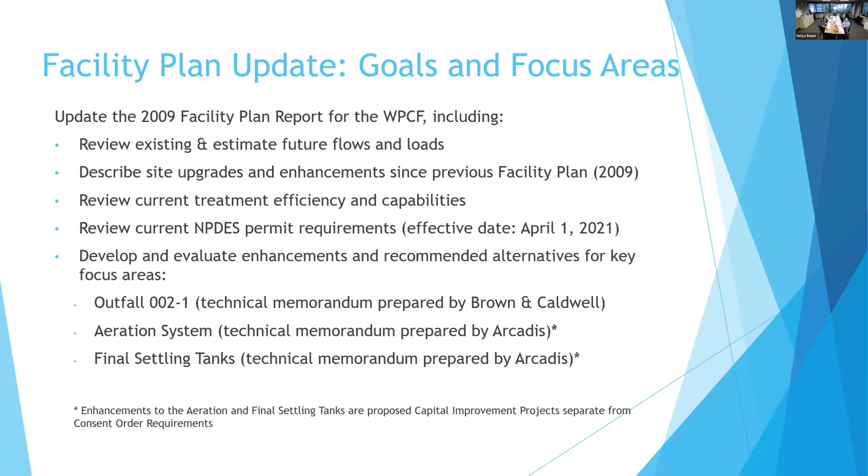And Arcadis is here to talk about the next slide. Thank you, Ralph. Vanessa McPherson here from Arcadis. I'm the project manager on our end for this facility plan update.

So the headline here on population flows and loads is that the plant continues to have ample capacity for treatment. You can see the figure that we're showing here on the screen has a red line at 18 MGD, which is the permitted capacity for the plant.

At 90% of that 18 MGD, or the orange dashed line, that would trigger the city and WPCA to need to submit a plan to the state for how they intend to deal with the fact that they're approaching that rated capacity. But what you can see in the chart is we're well below that.

So the green is the 180-day moving average of daily influent flow to the plant. And the blue line through that is the trend line that shows us trending downwards, which is really great and a testament to all the I&I reduction that's already been done.

And so that leaves us with a current 12-month average daily flow to the plant of 12.2 MGD. So that leaves us, again, with plenty of capacity, even with the roughly 650,000 gallons per day of additional flow that we'd be projecting just based on population increases and plan development in the city through 2030, as Ralph mentioned. So again, with 12.2 and the additional flow, still well within the rated capacity of 18 MGD.

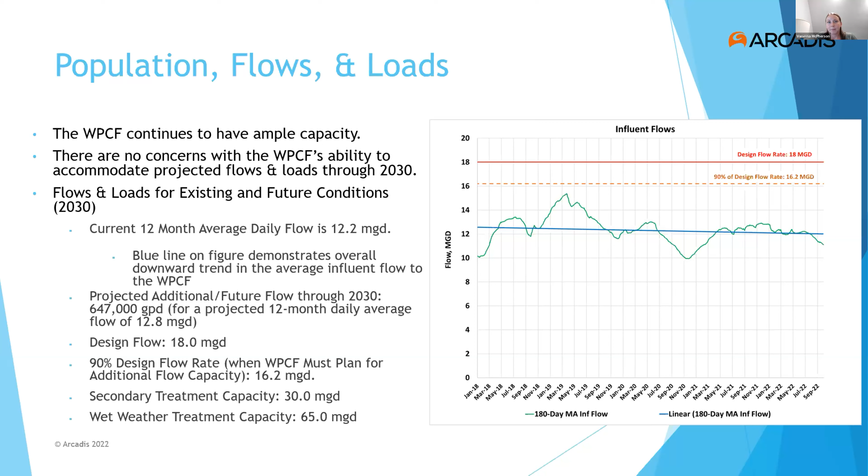So our next slide here shows permit considerations and process evaluation. As Ralph mentioned, we took a look at the current NPDES permit that the plant operates under, which is effective April of 2021. There are no substantial changes in the current version of the permit as compared to the last iteration, which is good.

Here on this chart, what we're looking at is the fact that the plant is performing extremely well. The red bar is the total nitrogen limit that the plant operates under, and the gold or orange bar is the general permit which Connecticut has for nitrogen. When you look at plant performance and that blue trend line, it's well within the permit limits for the site-specific permit and the general permit, with a downward trend, which is really a testament to operations and performance of the plant. An added bonus, in 2022 Norwalk ranked 5th in Connecticut for the nitrogen credit sharing program, which means you're selling credits or doing better than expected.

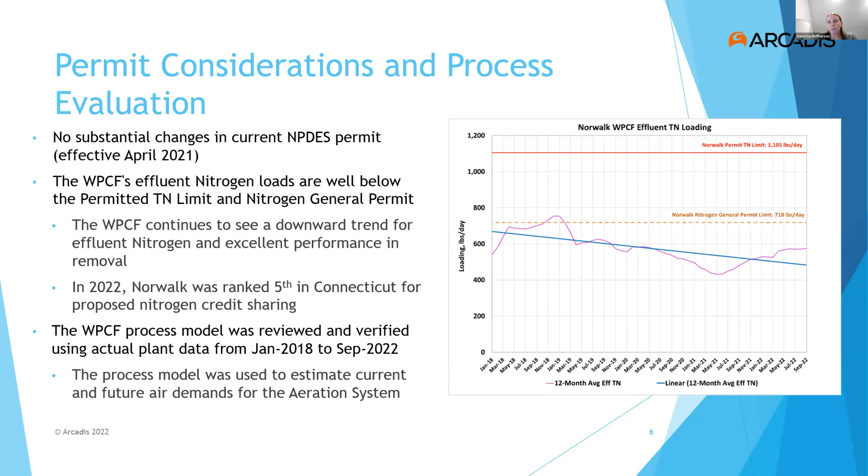We also took this opportunity in the facility plan to update the process model using actual plant data, to help us with certain tasks under the facility plan update, like sizing blowers, which I'll talk about a little bit later. So all good news here from population flows and loads and a plant performance perspective. And with that, I'll turn it back to Ralph.

Vanessa. So what we're showing here is a flow schematic at the wastewater treatment plant. We have 3 focus areas highlighted. The first 2, the aeration system and the final settling tanks, are highlighted in orange. This is outside the consent order. These are focus areas that we're looking to enhance long-term at the wastewater treatment plant, and also for asset preservation of the facilities at those 2 critical processes.

The third, the green box, is outfall 002-1, which is our wet weather process and discharge, which only activates less than 4 times a year, typically in a typical year.

The next slide, Beryl's going to talk about. Oh sorry, if we can go back to the previous slide - the next slide we are going to talk about outfall 002-1 in more detail. There's a couple options. Originally, Arcadis looked at adding treatment at the facility for outfall 002. When we looked at that, we started looking at an alternative approach, which ties us back into the collection system - approximately 206 miles of pipe - and looking at what we can do to reduce flow to the treatment plant. So Matt's going to talk about the advanced elimination of outfall 002 on the next slide.

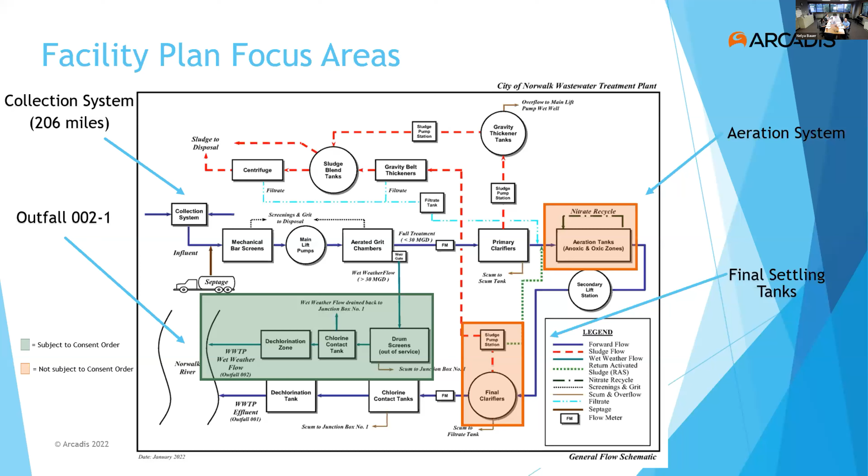Thanks, Ralph. As I mentioned in the previous slide, the consent order with Connecticut DEEP addresses 2 different areas within the Norwalk system. One is the collection system, that was addressed in the collection system master plan. The second is the facilities plan update. Within that facilities plan update, there are 2 additional options that the city can use to achieve compliance with that consent order. We have those 2 options laid out here.

The obligation requires the city to develop a facilities plan update, which, as was mentioned before, was in the works prior to the consent order. But that facilities plan is required to evaluate a range of viable and cost-effective measures to either, option 1, provide outfall 002 with primary treatment or its equivalent, or, option 2, eliminate outfall 002-1. Those were the 2 options that Ralph was discussing when looking at the schematic on the prior slide.

Vanessa Valadares, Chief of Operations with the city, is going to talk a little bit about the approach that we took, looking first at option 1 and then option 2 moving forward.

Thank you, Matt. So what we did is first we looked at option 1 and see what we could be focused to update the facility plan. Arcadis explored options for how we could provide primary treatment during the wet weather. After all those studies, we came up to the conclusion that we would need to invest about $45 million, and we're only going to be using that outfall on average less than 4 times a year.

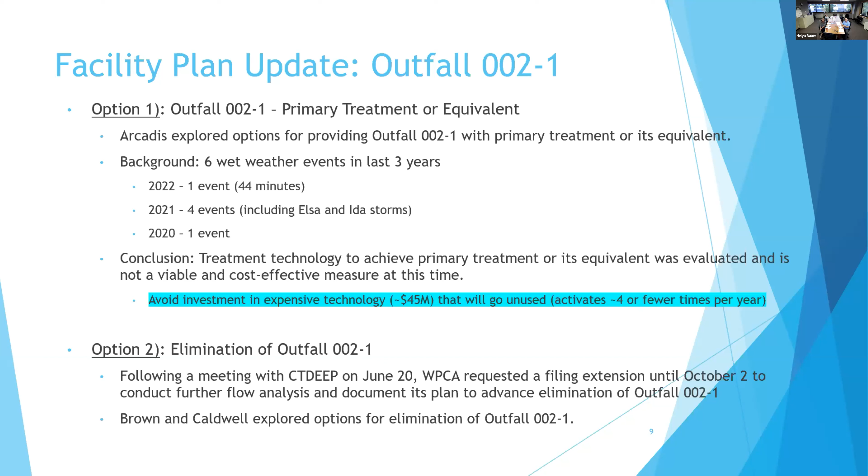Great, thanks, Vanessa. Eric Muir from Brown and Caldwell. As Matt stated in the intro, we can go to the next slide right there.

As Matt stated in the intro, I was in front of this board about a year ago in September with a very similar slide where we discussed the collection system master plan as it was submitted. Just as a refresher, what we did during that master plan is a flow metering exercise and then developed a calibrated model of your collection system flows. In that model, the data showed us that 18 sewer sheds exhibited excess flow generation, meaning they generate excess inflow or infiltration, either from directly connected sources or deficiencies in the collection system.

That represented an opportunity, given the costly venture of doing primary treatment for very little use at 002, to take a look at whether we could do something different in the collection system and reduce the flows.

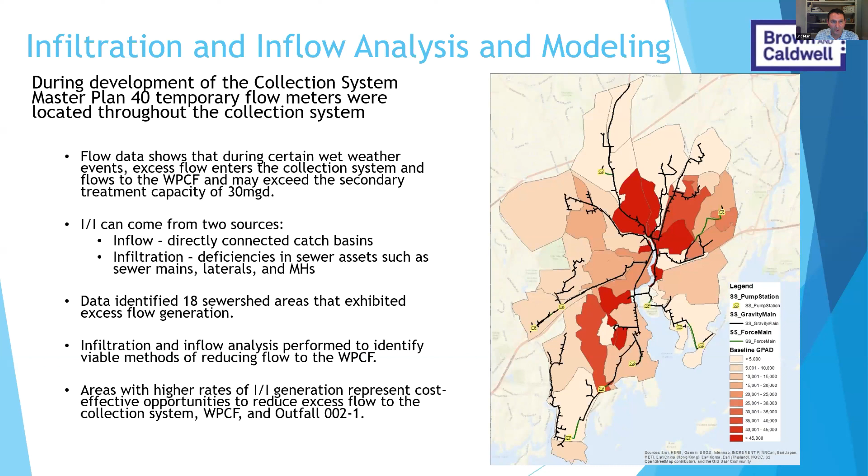So what we did is take that model we had generated about a year ago and looked at it again, asking what if we supercharged infiltration and inflow removal over a 10-year period, as opposed to the extended asset management timeline originally discussed in the collection system master plan. Could we progress towards elimination and advancement of the elimination of 002? Could we progress the overall reduction of other overflows and SSOs in the collection system?

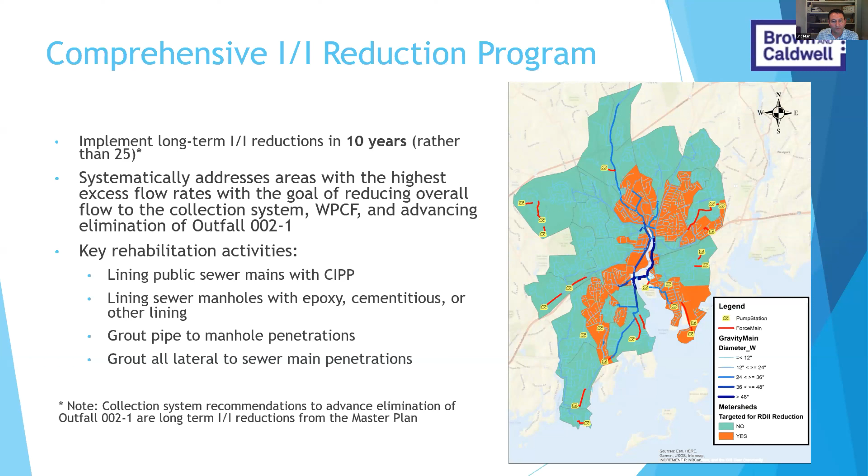We modeled key rehabilitation activities in those 18 sewer sheds that still exhibited high excess flow. We looked at lining the sewers, which is an asset renewal that keeps flow out. We looked at epoxy lining of the manholes, grouting the pipe penetrations to the manhole connections, and grouting the lateral connection points to the sewer mains. Then we modeled what those flow reductions would look like and ran the model for several different storms.

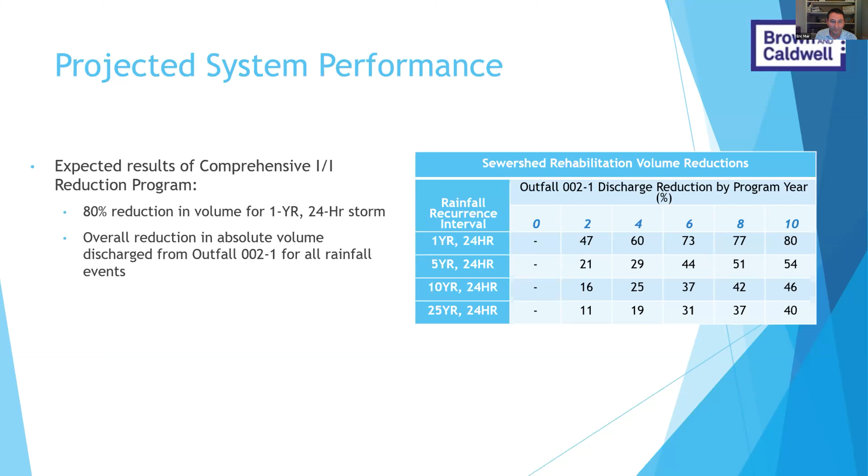This table shows the output of those model runs, and it turned out to be really good news. It showed an 80% reduction in overall volume going through 002 in a 1-year, 24-hour storm. The table on the right shows we're at year 0 right now, and if we tried to do this over 10 years, it shows the 2-year increments of volume reductions through the program years. The rows going down show the 1-year, 5-year, 10-year, and 25-year storm. So really good advancement from a collection system standpoint—an 80% reduction in flows in a 1-year, 24-hour storm. That's extreme progress towards renewing your assets and substantially reducing flows.

Next slide. This shows that same information in a different format. Each column is a different storm event. This also shows the typical year that Ralph was mentioning earlier, where we can model how many activations we have in a typical year and show that volume reduction as well. There you get to almost a 90% reduction in a typical year in the volume going through 002. The bars going across show the volume reductions by those 2-year increments. The one all the way to the right for each storm would be the end result. You can see graphically there are substantial reductions across the board.

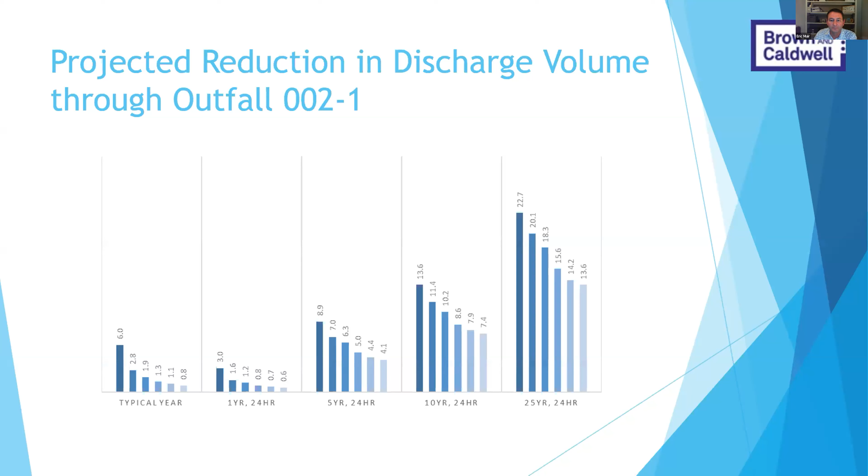This slide shows the costs of a rehabilitation program like that—program years, length of sewers rehabbed, construction cost, engineering and contingency cost, the 2-year increment cost, and a total cumulative cost. What you can see is the total cumulative cost over a 10-year period is pretty close to what Arcadis came up with for projections of a cost of new treatment at 002, with a total program cost of almost $50 million.

And here what you're getting is really a completely renewed asset as opposed to a new asset. This acts every single day—we're reducing flows to the treatment plant. So there's a ton of benefits that come along with it. But the other substantial thing is for that collection system asset, which is you guys have about 200 miles of gravity main, this would represent almost 25% renewal in that collection system.

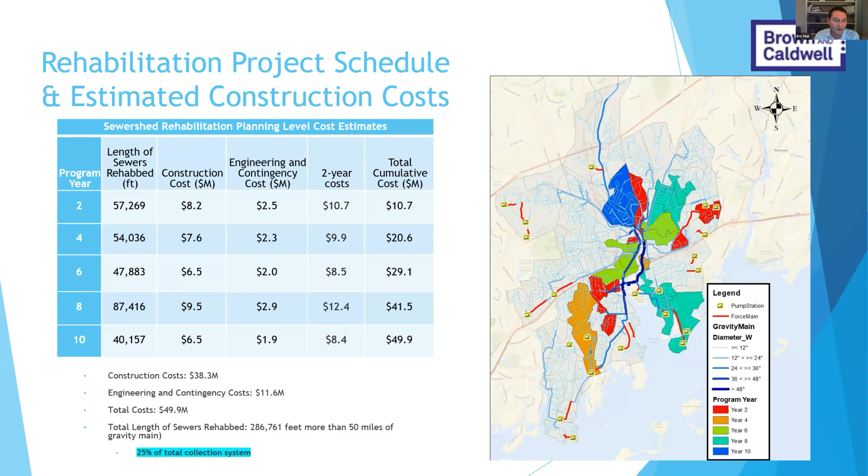So in other words, we're touching 25% of the collection system and rehabbing it in some way to reduce those flows. So you get an asset that you already own that gets renewed and has a new 50-year life cycle on it. With that, I'll turn it over to Vanessa to talk about some of the other benefits.

So beyond that, we realized there were other benefits we're going to gain if we pursue option 2, which is the advanced elimination of outfall 002. We have environmental benefits, including enhanced water quality in Norwalk River and Long Island Sound, reduced potential CSOs, and reduced potential SSOs. That will also help with advanced elimination of the Ann Street emergency overflow siphon, and of course we'll be in compliance with the Connecticut DEP consent order, fulfilling that obligation.

Besides the environmental benefits, we'll also realize energy efficiency benefits because we're going to reduce the WPCF operation and maintenance due to a decrease in overall flow. We'll also improve process performance through reduction in peak flow and duration of sustained high flows, so we'll likely be operating more consistently at an optimal stage. That's very aligned with Connecticut DEEP's energy efficiency goals.

Another important thing, which Eric touched on, is that this investment will also help preserve our assets. We're going to be shifting money toward assets we already have and giving them an even longer life.

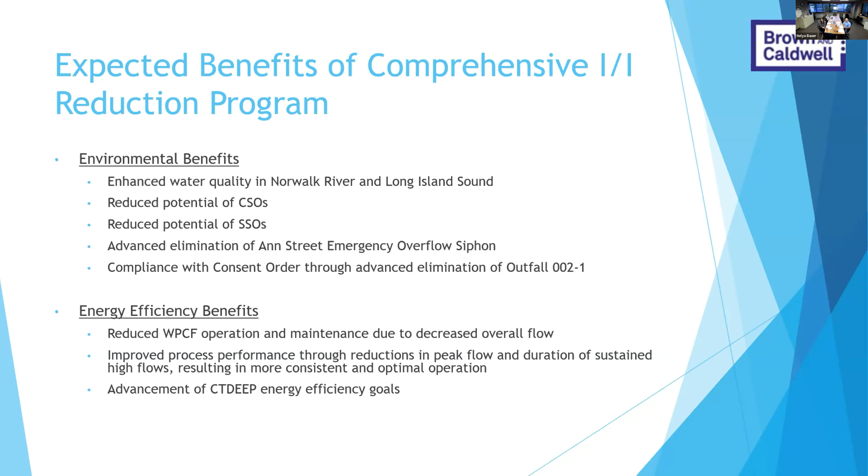So now, regardless of the elimination of outfall 002, as explained earlier as part of the facility plan upgrade, we were able to identify two focus areas where we believe we can make capital improvements in the next few years that will provide benefits. Vanessa McPherson will now go back and explain what we found and what the benefits will be from targeting those two areas.

Thank you. It's fitting to roll into the aeration system right after the energy efficiency discussion. This is one of the biggest energy users at the plant, and we've found significant ways we believe we can improve aeration, which is really the heart of the treatment plant—that's where nitrogen removal happens.

So what we're proposing for the aeration upgrades scope would be a comprehensive upgrade to the entire system: the blowers that supply the air, the diffusers that get air into the tanks, the piping that brings it there, valves, flow meters, and really everything within the tanks.

It also encompasses significant improvements to the secondary control building, or SCB, including replacing some antiquated medium voltage equipment with more modern low voltage power for the blowers. We'd also be looking at code compliance, architectural improvements, structural improvements, and significant layout improvements within the building to increase resiliency. Right now the blowers are located in the basement, or lowest level, of that structure.

I'll talk more on the next slide, but we're proposing relocating those blowers within the building to keep them out of harm's way, which also helps with construction sequencing. When we look at all of those recommendations, we estimate a construction or project cost of around $48 million for the aeration upgrades.

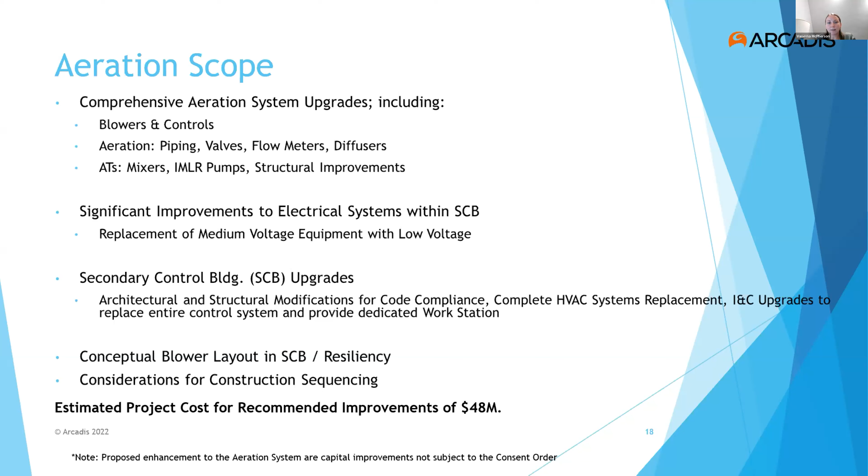On the next slide, I'll touch quickly on how we selected the blowers. As mentioned, we updated the process model for the plant and worked with Veolia to identify DO targets in each of the zones. We selected blowers that can turn down all the way to the minimum, and also have room for expansion to the peak flow, so they can cover the full required range for aeration.

We looked at energy efficiency, footprint of the blowers, and redundancy for staff operations. The blowers we selected are turbo blowers. They'll be located on the mezzanine level of the SCB, secondary control building, with a total of 4 blowers and space available for additional blowers if needed in the future.

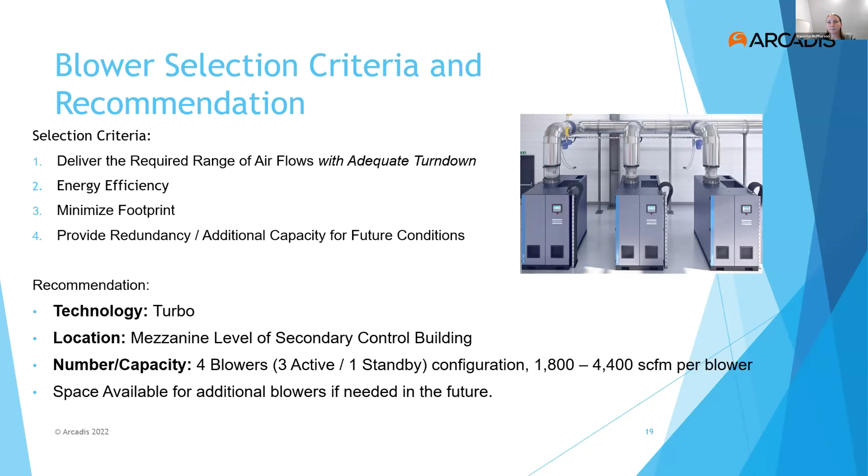So with that, I'll touch on final settling tanks, which is the other focus area of the facility plan, not subject to the consent order, but good to keep in mind for capital planning and operation of the facility. We looked at retrofitting the 4 existing concrete final settling tanks with new mechanisms, and we looked at 3 different options for technology for the mechanism replacement.

Spiral scraper is the selected recommendation for mechanism replacement, so we're proposing to move forward with that.

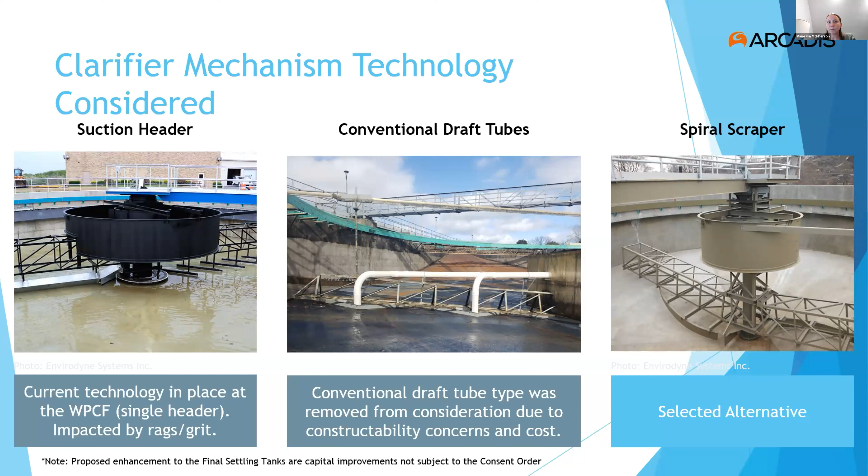On the next slide, similar to aeration, we're not just stopping with the mechanism. We're also looking at doing some modeling to design an energy dissipating inlet, which will help with sludge blanket stability and sludge removal, and different options for baffles and effluent launder covers to prevent algae buildup. We're also recommending some increases to RAS pumping capacity, which we'll refine as we get into detailed design. But overall, the recommended improvements for the FST area are $20 million.

And with that information, I'll turn it back over to Chief Valladares to conclude us.

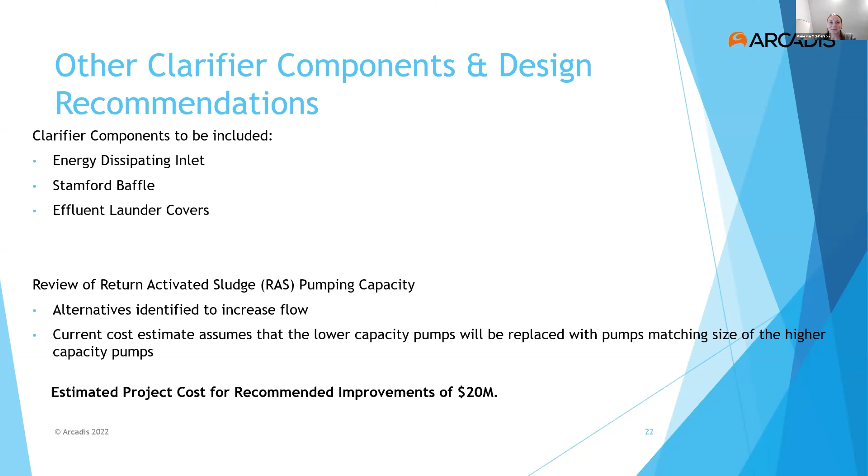Thank you. So what we would like to get from you guys tonight, as part of the resolution that will come after the presentation, is approval of the summary of the facility plan that we plan to submit by the deadline of October 2nd. So the facility plan update will have 3 components.

The first one will be that instead of going with option 1 that was shown before, which is really the facility plan update, we're going with option 2, the advanced elimination of outfall 002. As we mentioned, we believe we can increase the investment and complete in 10 years what originally we thought we could do in 25.

It's definitely going to meet our consent order. We're going to really invest in our asset, and we're going to go toward the goal of advanced elimination, as you could see on all those slides, and only use it for a few events. So that is the first part of the plan.

The second part will focus on the other two areas that Vanessa just explained, the aeration tanks and the final settling tanks. I want to emphasize that the investment in the outfall 002 advanced elimination is really what's part of the consent order, and that will be our financial obligation after we submit the plan. That will be about $50 million.

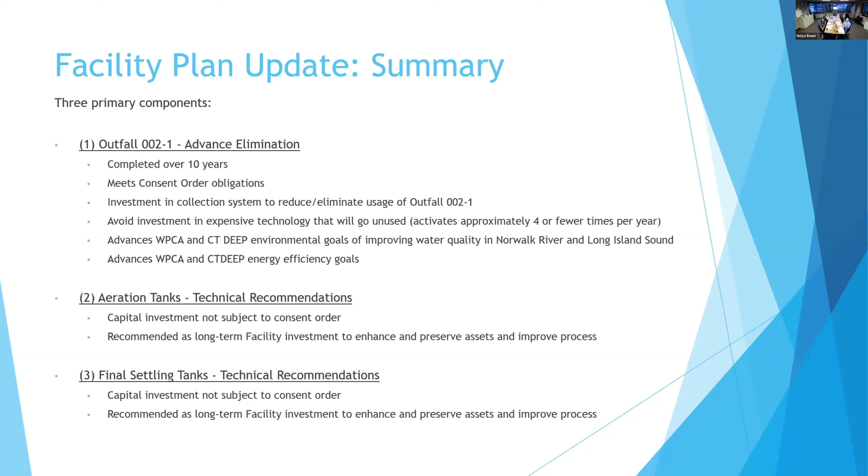So I think with that, this is really what we wanted to show you guys. I also want to thank the team. They did a fantastic job, particularly these last 90 days when we decided to move to a totally different direction, and everyone came together to present this on time. So with that, I'm open to questions.

Okay. So we're taking care of the consent order. The facilities plan is going to address part of the consent order. It's going to cost us $70 million over the next 10 years. And by authorizing the Chief of Operations to submit the facility plan, we're kind of committing to that. Is that right?

I just want to clarify that we're going to be committed to $50 million for the next 10 years. So this is really the commitment. The other 60, yes, 50, that is... 49.9, so let's round it to 50. The other $78 million that we identified as areas we would like to focus on for enhancement, we don't have to do right now. We are planning to probably do that after we have most of this investment in the collection system done. So we're going to spread out those $78 million probably after year 10, and the next 10 years after that we'll probably be able to spend the 78 million.

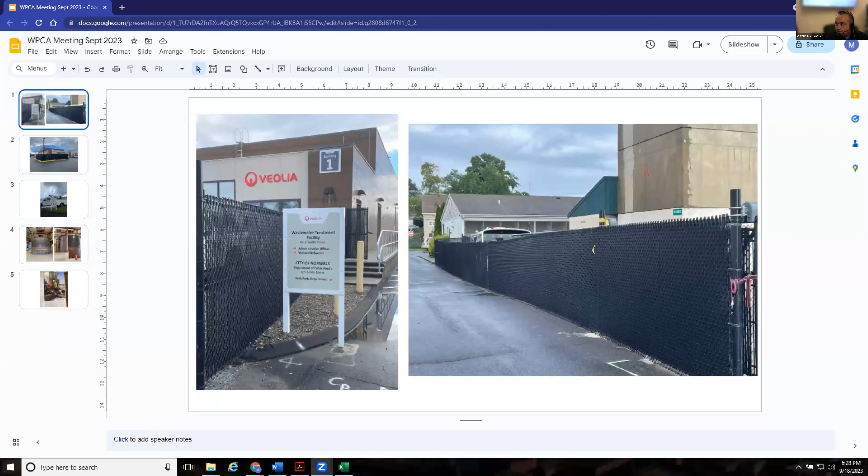One of the things was a fencing and signage plan that we've worked with the WPCA on. This is by the main office. We slatted the entire fence and straightened it out. They also slatted the entire front of the facility, all the way across, including DPW. This is the septage receiving area, kind of an eyesore for our facility. So working with Ralph, WPCA, us, and our fencing contractor, we decided to fence and slat the whole area. It looks a lot better.

Part of the signage process, we've also co-branded our office area. It came out really nice. We have bubble letters that stick out, the WPCA Norwalk and Veolia. And you can see here, we put new building signs in all the buildings. So we've been really working on updating the aesthetics of the facility, making it look really well, and it's coming right along. We have signs throughout the facility that could direct you to operations, deliveries, etc.

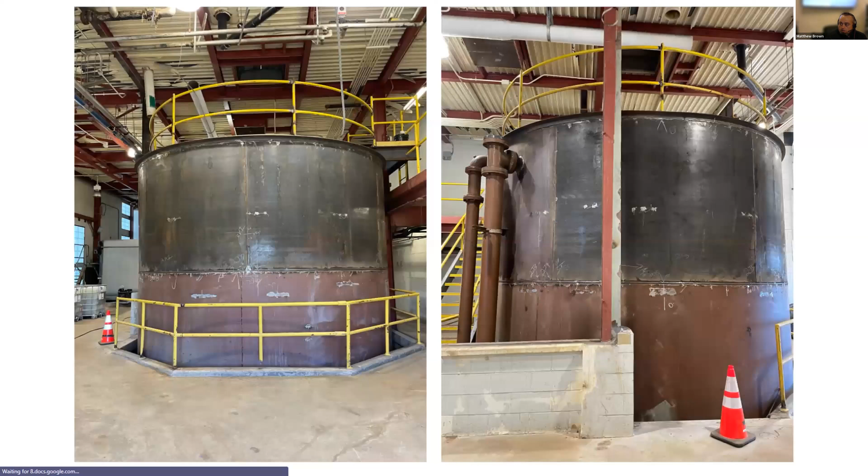This is the blend tank that I was speaking of. We have two of these blend tanks. One's a sludge holding tank. One we blend primary sludge and secondary sludge to run over our centrifuge. That's how we make what we call cake, which is a 28% solids product that gets sent out and incinerated. And that's how we keep our plant where it needs to be with microorganisms.

The Fisher Tank Company came in, they spent about 5 weeks here, morning, noon, and night, and replaced the entire roof and all the sides of the blend tank. What's going to happen next is we already have a contract with them, it's been approved by the WPCA. A coating company is going to come in, sandblast old and new steel to get it down nice, and then do a thick coating on the inside and a coating on the outside. That'll be ready to be put back online hopefully by Thanksgiving, because the schedule for the coating looks like mid to late October, and that's about a 2-week process.

That's one of our large projects that's been going on for over a year. Some of you might remember we were fixing it about a year ago. The sandblasters came and blew holes right in the side of it, and that's what led to replacing all the steel. But that came together.

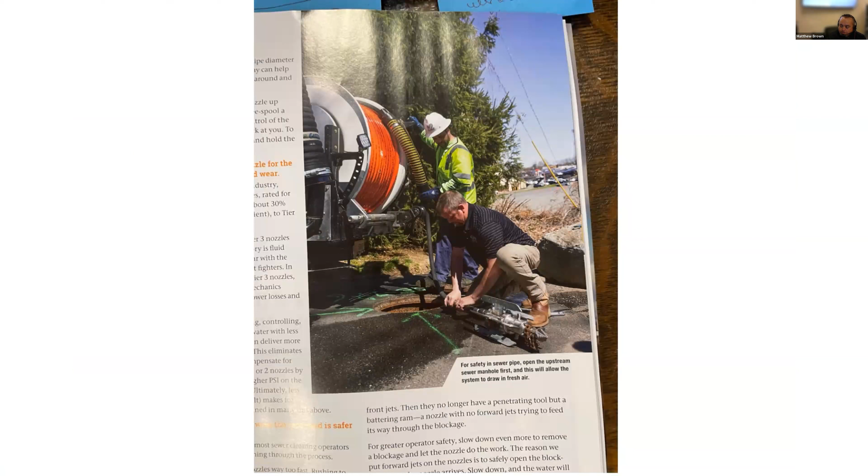Lastly, I just wanted to put this in there. It was taken about a year ago, but Public Works Magazine gets delivered to probably every municipality in North America. That's our Davidson, and that's our truck, WPCA's truck. We were featured in that with a chain cutter. So we were in Public Works Magazine. It made our employee Davidson's day, and the collections team were very happy to see it. I just wanted to share that with everybody.

If you have any questions, I'd be happy to answer them.

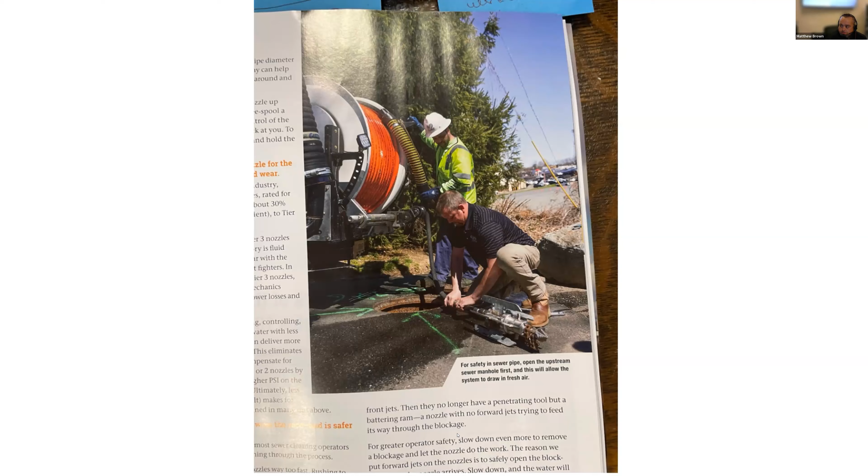The fiscal year 22-23 and fiscal year 23-24 revenues and expenditures news report is attached. Copies are included if there's any questions on that.

Now we have a discussion of the WPCA engineering projects. The Bell Island Salmon Street project consists of about 8.5 miles of pipe lining. The pipe is primarily asbestos cement pipe that's in poor condition, 8-inch to 24-inch pipe size. We finalized the bid documents in early August, and the project was advertised for bid in mid-August. We're currently receiving questions from contractors, and I've been working with the Brown and Caldwell team to respond to those questions. The bids are going to be received on September 28th.

The Catch Basin Disconnect Program, as part of the collection system master plan, identified catch basins that are significant inflow contributors to the collection system. We're currently working with the Brown and Caldwell team on the project. The city stormwater field staff provided assistance by surveying catch basins in the vicinity of those to be disconnected. They were able to record dimensions and invert depths. That investigation lasted about 2-3 weeks, so it was really productive to get all that field information we needed.

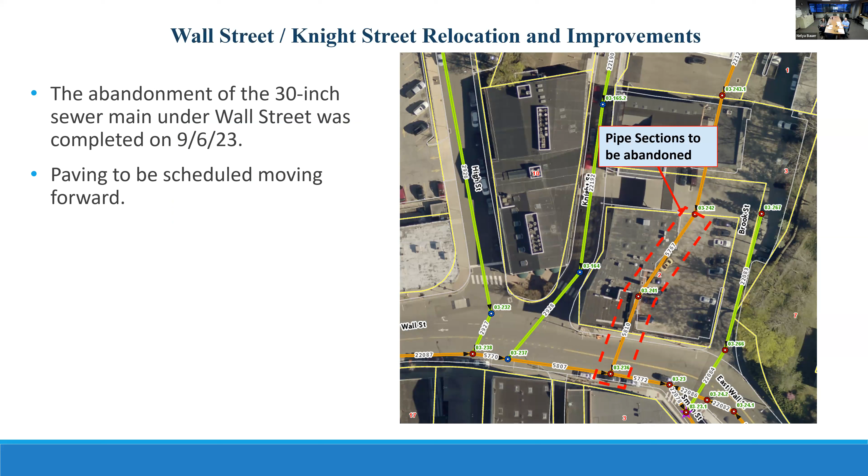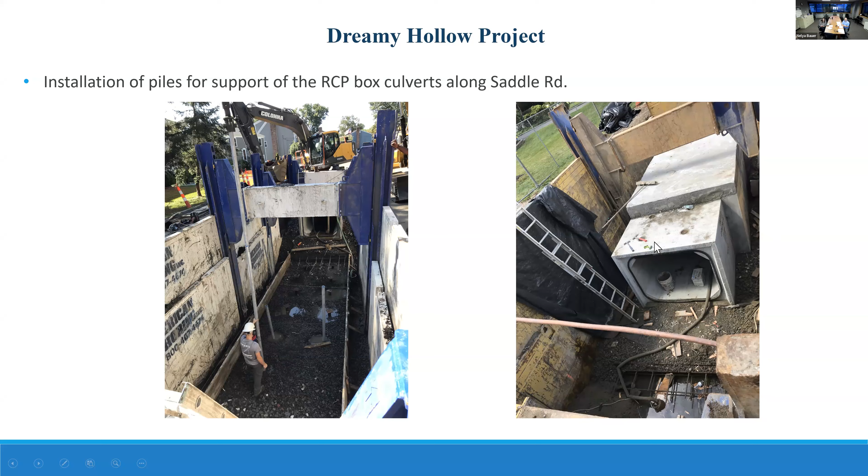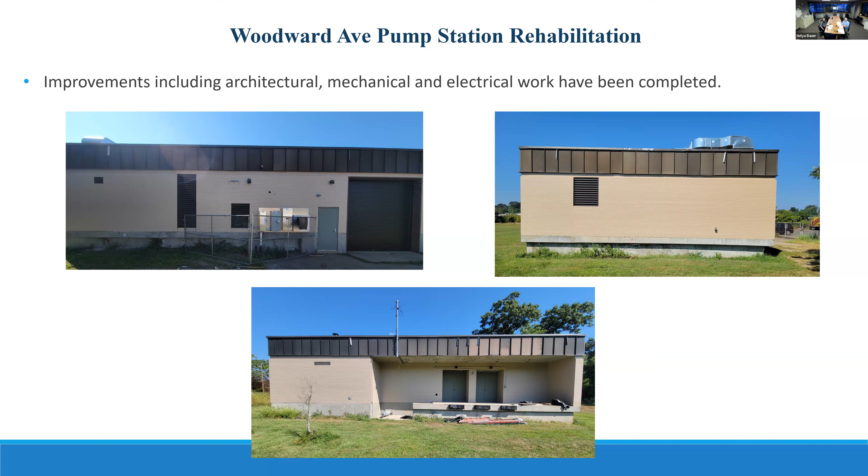Pump station upgrades: we have Woodward Ave and 5 Mile. Woodward Avenue is mostly complete, which included architectural, mechanical, and electrical work, so most of that work has been completed. These photos show some of the exterior work - it has been painted, a fresh coat of paint, so it looks pretty good. You can see some architectural work, new louvers, new exterior doors, and moving forward is just some interior painting and exterior paving at that pump station.

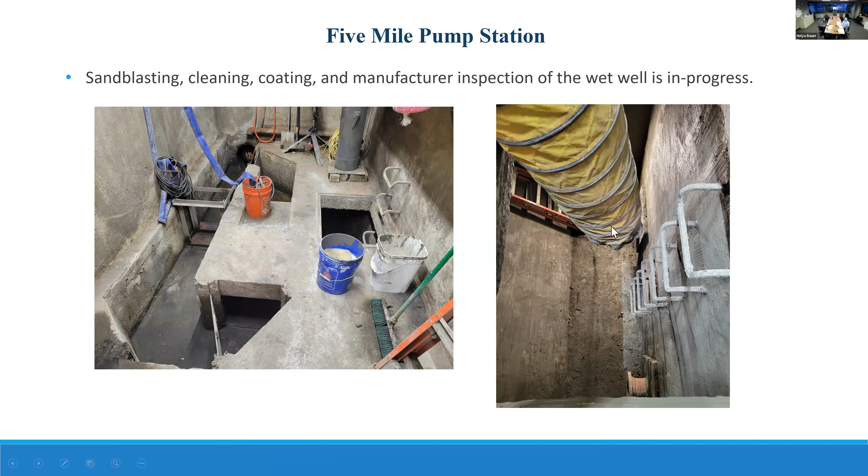These are photos of the work at the 5 Mile pump station. The contractor is currently sandblasting, cleaning, coating, and performing a manufacturer inspection of the wet well. This shows the upper portion of the wet well area, and these are photos inside the wet well. The contractor is also working on the installation of new piping and pumps on the lower level. This is at 5 Mile.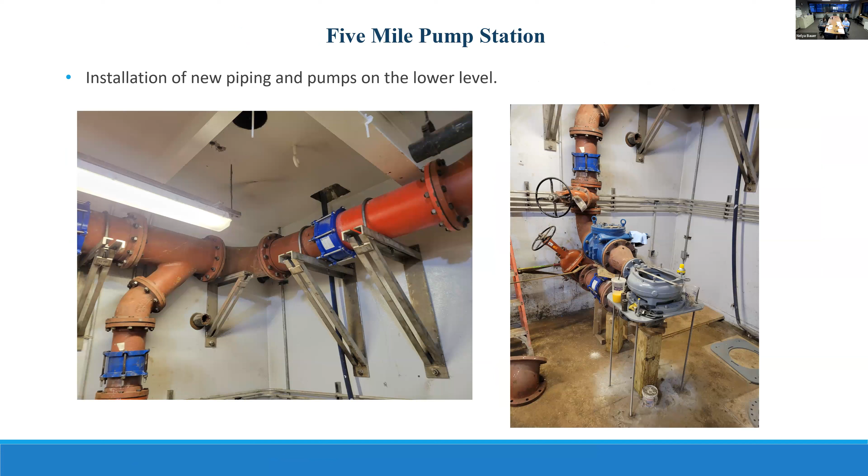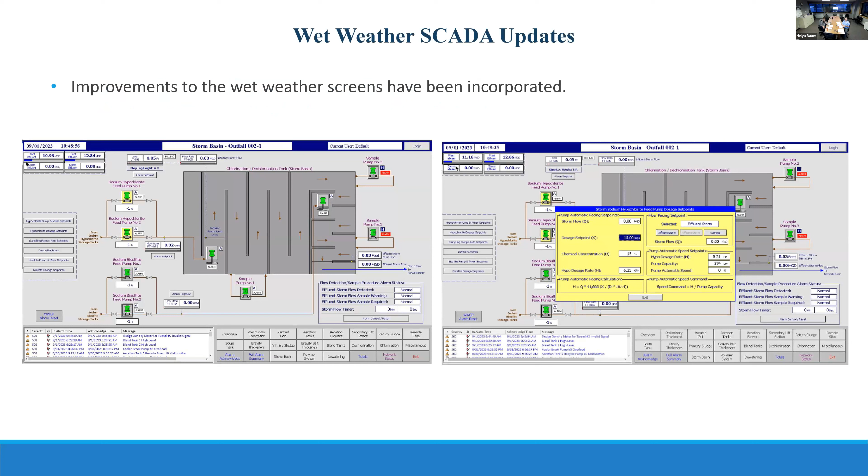For SCADA upgrades, we have some wet weather updates. These photos show the updated wet weather screens. We incorporated comments that we received from the Veolia team, from the operators, to make the system more user-friendly. In general, we've been updating SCADA as an ongoing process to get as many operator comments as we can and just improve the functionality. Thank you, that's all I have.

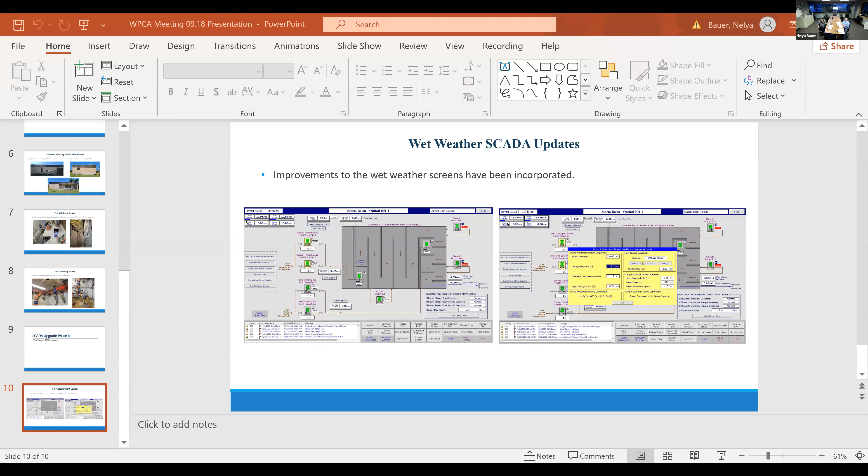And in item D, sewer bill appeals adjustments to date is $24,113. Going back to the slideshow presentation, if anybody has any questions on any of the construction projects, feel free to ask away.

Otherwise, that is it for tonight.

I'd just like to say that was an excellent presentation earlier this evening. It was comprehensive and well orchestrated, and you moved from speaker to speaker very nicely. So thank you, thank you very much. Almost like they did that before. Yeah, it seemed practiced, didn't it? Yeah.